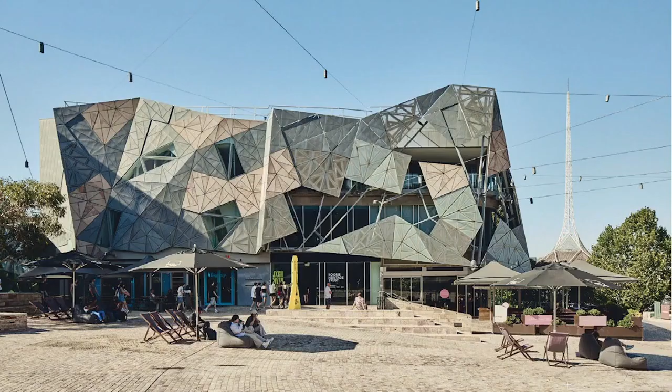The project is really a narrative about how to eke out a small but significant piece of public architecture within the space of the city.

And the story really begins with the so-called Yarra building at Federation Square, where about 7 or 8 years ago, all of us were involved with moving the Koorie Heritage Trust into the top floor of the building, where they were literally like a tenant, commercial, what Fed Square viewed as a commercial building, but nevertheless the Trust were at the time extremely ambitious about how they might occupy the building and asked us to speculate about how they could make the building more connected into the space and the culture of the city, and more particularly into the space of Birrarung, which obviously holds great significance to the community.

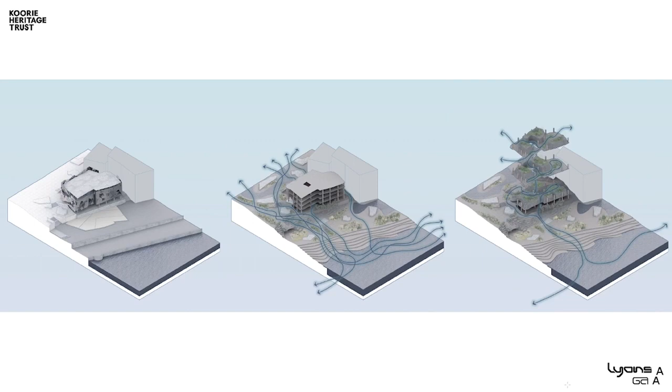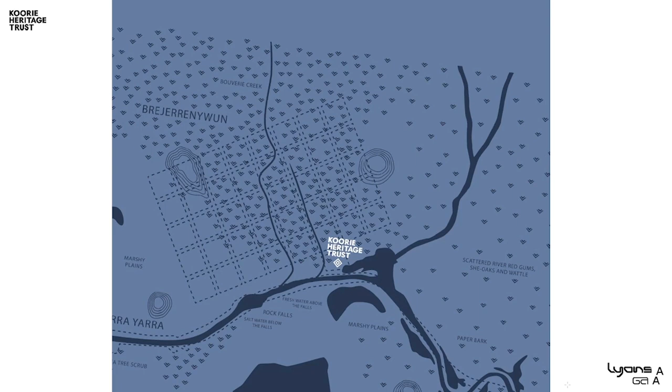So they asked us to look at these drawings, and we did quite a lot of work on that, about how the project can reinforce the importance of Indigenous knowledge at the centre of the contemporary city, but also to look at how the idea of country and landscapes, particularly Birrarung, which is a chain of ponds, as well as the river, could also be reflected back into Federation Square and into the design itself. So it was about connecting the square with the river, which has always been problematic, and also about using the space between Dyke Falls and Yarra Falls, where it's located, to start to connect the idea of Indigenous culture with ecologies.

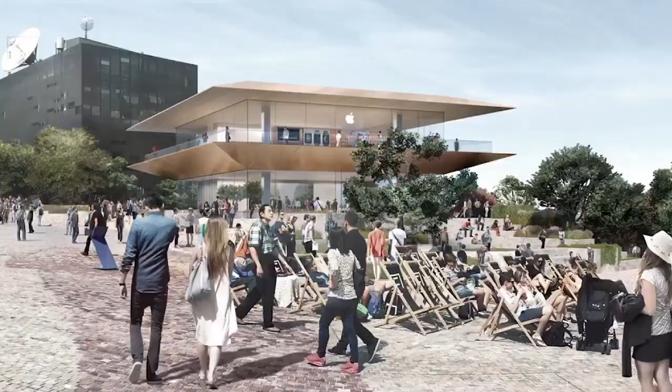Our work was heavily disrupted by this little episode in the public discourse of the city about what is public architecture, and from great work by many people to rally around that idea, that eventually led, as you would know, to the buildings being heritage listed, and indeed a complete change from Fed Square being a sort of commercial enterprise to MEPCO, which is like cultural enterprise.

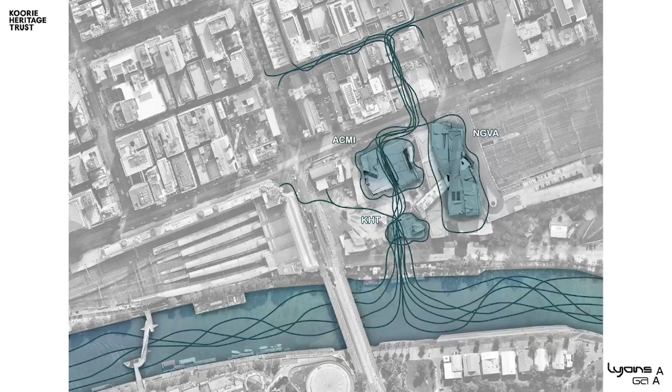So we were able to return to these drawings and really think about the project as a public architectural cultural project, and for the building, if they occupy all of the building, to really take space alongside ACMI and NGV as a three-way split of cultural enterprise, but more importantly bringing Indigenous cultural enterprise directly into the heart of the city.

And that included, given we were working within a heritage building, not that old, to create stronger connections between Fed Square and the space of Birrarung, and wherever possible, again within constraints, to open up the project into the space of the city.

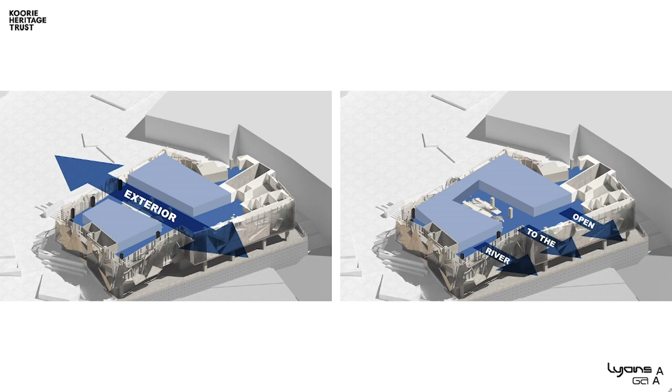Okay, so without further introduction I'll have Jeeva talk through the project in more detail. So the main transition is from the Trust being effectively tenants, mostly in the top level of the building, with a small occupation of the ground level, to basically the entire building.

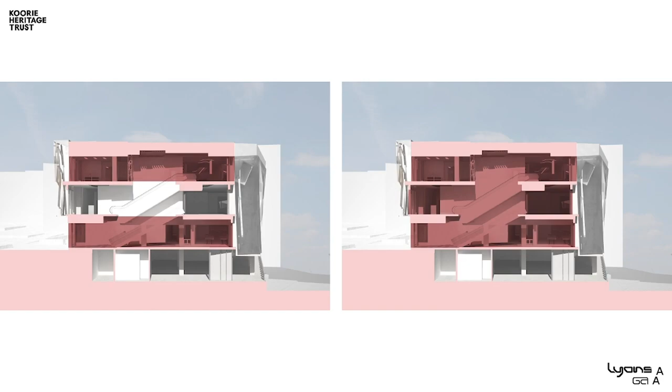And to sort of summarise where it got to, through the Trust's advocacy, the building is no longer the Yarra building, it's the Birrarung building. Instead of having their name as a tenant on the pylon out the front, the whole building is now a KHT building, and at that point we're going to take you through the front door.

Picking up on the metaphor of the scar tree around ecological practice and understanding the cultural meanings of this place has been really important, so the connection from the river to the bank, but also the ecological considerations of how we think about caring for country has been really pivotal.

Repurposing materials, we use spotted gum throughout to create this figure as part of this textural quality and sort of tactility of the experience within the interior space.

And then also understanding the cultural practices, and certainly things like, there's no dots down here in the southeast, so really looking at the chevron pattern and the relationship to the scar tree as mnemonic markers in the landscape as you start to move your way through the space.

Importantly, thinking about things like the blossoms of the eucalypt, the sap from the river red gum, again, it becomes the sort of codifier of the cultural meaning and the colour treatment and material choices.

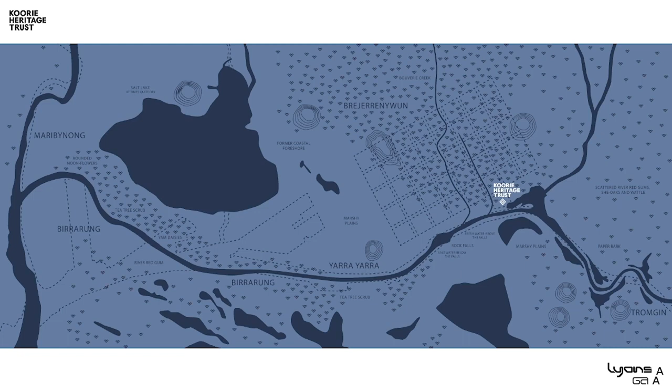Certainly centering that relationality of country has been a key driver in terms of how we think about those chain of ponds as a way of navigating the movement patterns and the intuitive wayfinding.

You can see spatially as we come through from the entry into this more communal space, where children from schools come to quite often, look out the spaces and really engage with the cultural experience.

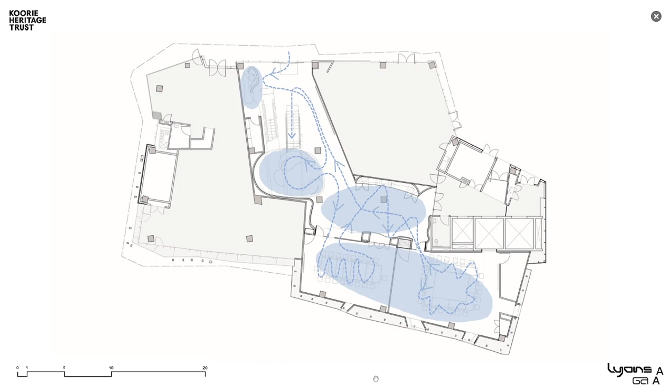You can see that sort of movement pattern of how we engage and pull people through the space, and certainly reconnecting to the Birrarung, the river of mists and shadows, and the figure in the ceiling as a way of echoing that movement of water and that connectivity.

And then you can see as we start to move from the concierge desk, which is really using that material, pulling you up the escalators. You can either go up to the gallery spaces or into the community spaces to the left.

You can see this figure in terms of those communal connections and really showcasing culture. You're enveloped by the cultural collection of which the Trust is the custodians. And then you can see these gathering spaces, these pause points are really important.

And then you can see how we're starting to really engage with the colour and the movement. And then the key points of connection are really these spaces where people come together.

Sorry, this is very frustrating.

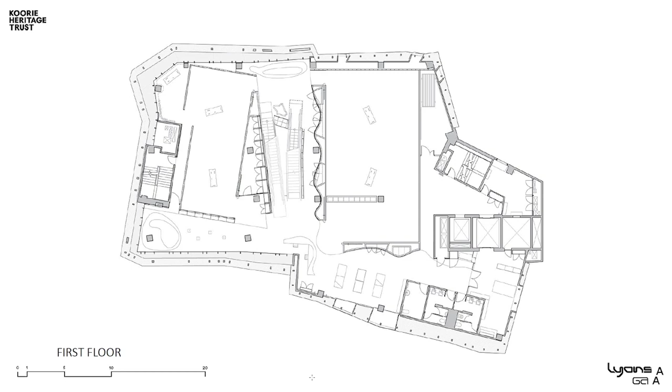And you can see through here how we start to really unify and peel back those layers, different purposes. You can see here as we move to the upper floor, two really significant gallery spaces, and the space between as well is really important.

That connectivity really unifies the idea. Coming up, we're seeing this relationship here to the manna gum as part of the expression of welcome to country. You can see those movements and openings in those apertures to the river.

The cultural collection is really important as part of the experience, showcasing and celebrating culture, connecting back to the square, certainly. Those mnemonic markers as the wayfinding intuitive movement patterns, again connecting to the treetops and orientating oneself to country.

And importantly, you can see the colour as a signifier of the importance and the lifeblood of the river, and so that becomes a really important motif.

But significantly too, this is by, for and with community, so Indigenous supply chain from design, construction, key contractors, artwork, installation, Indigenous client has been a really important element.

And so while we might have had some lack of success from the referendum last year, this is what Yes looks like in terms of the context of architecture signifying the importance of how we embrace our shared humanity and culture.